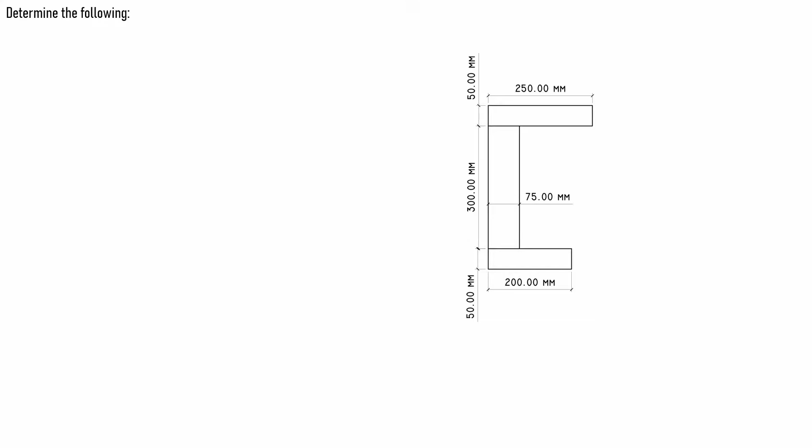Ito naman yung figure natin. Wala tayong symmetrical axis na parallel sa vertical at saka sa horizontal axis. Ang area natin composed ng tatlong parts. Hinati ko na lang ng 250 by 50, 75 by 300, tsaka 200 by 50. Ito yung mga kukunin ulit natin.

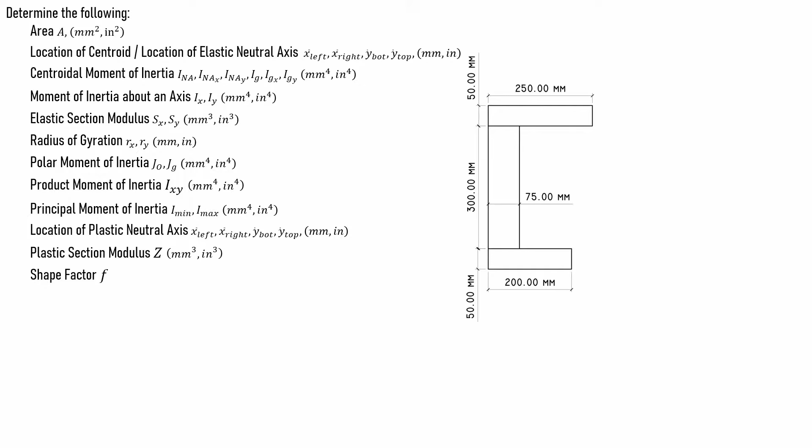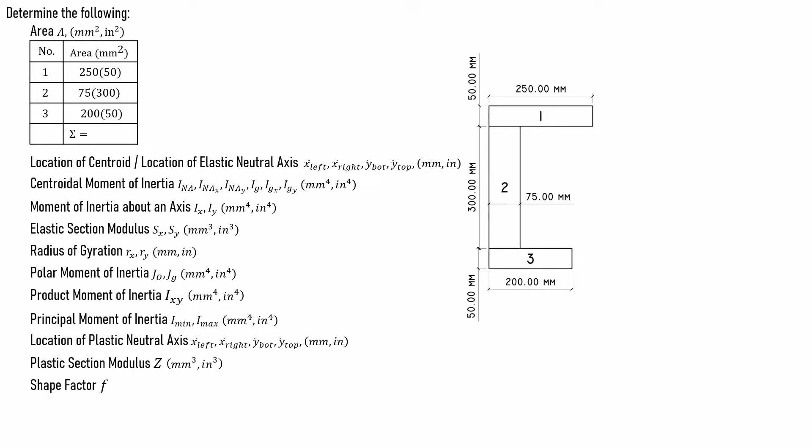Una natin kunin yung area. Lagyan ulit natin, divide natin to ng tatlong area. Tapos table ulit. Area number 1, 250 by 50. Area number 2, 75 by 300. Tapos yung area 3, 200 by 50. So sum ng area nila.

250 times 50 plus 75 times 300 plus 200 times 50. So 45,000.

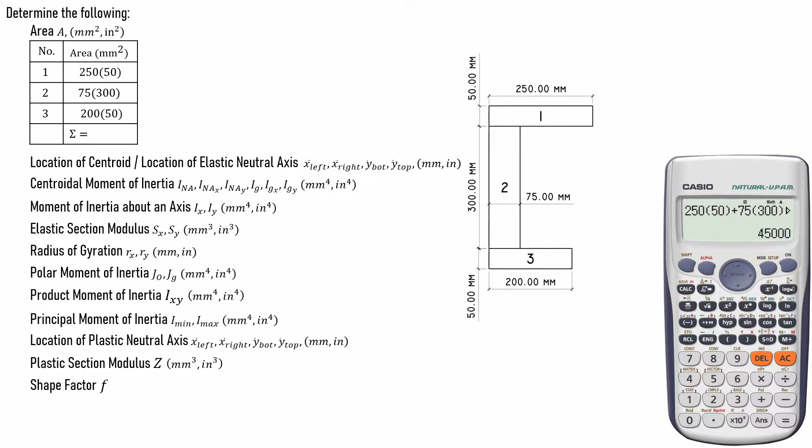Tapos naman yung location of centroid or location ng elastic neutral axis. Unahin natin dun sa x left at x right para makuha natin yung vertical na elastic neutral axis.

Yung distance ng local centroid ng area 1, 2, and 3 dun sa leftmost part ng section ay, una, area 1, so kalahati nun, so 250 over 2. Tapos yung area 2 dahil rectangle, so 75 over 2. Tapos yung area 3, so 200 over 2.

Tapos yung formula natin, equation para makuha yung x bar left. Yung total area multiplied dun sa x bar left equal sa summation ng ax left. Ito yung a times x left. So solve natin.

250 times 50 times yung x left niya na 250 over 2, plus 75 times 300 times 75 over 2, plus 200 times 50 times 200 over 2, over total area na 45,000.

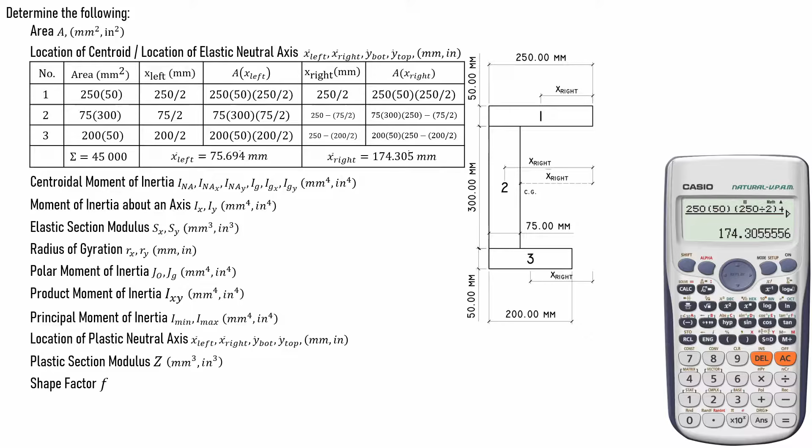Para naman dun sa location ng horizontal neutral axis, yung distance naman dun ay vertical. So y bot at y top. Una yung y bot. Table natin, distance ng individual centroid or local centroid papunta dun sa bottommost part ng section.

Sa pinakababa, yung una, area 1, so yung pinakamalayo, so 50. Yung vertical distance ng area 3 plus yung 300 nung sa area 2 plus yung kalahati ng 50, so 50 over 2. Tapos sa pangalawa, yung bottommost section plus yung kalahati niya, 300 over 2. Tapos sa pinakababa naman, so 50 over 2. Tapos multiply yung area times y bot.

Solve natin. 250 times 50 times 50 plus 300 plus 50 over 2, plus 75 times 300 times 50 plus 300 over 2, plus 200 times 50 yung area 3 times yung distance, so y bot, so 50 over 2, over total area na 45,000.

Yung y bar bot naman ay 209.722, so store natin to sa y. Para naman dun sa y bar top, kunin naman natin yung y top section.

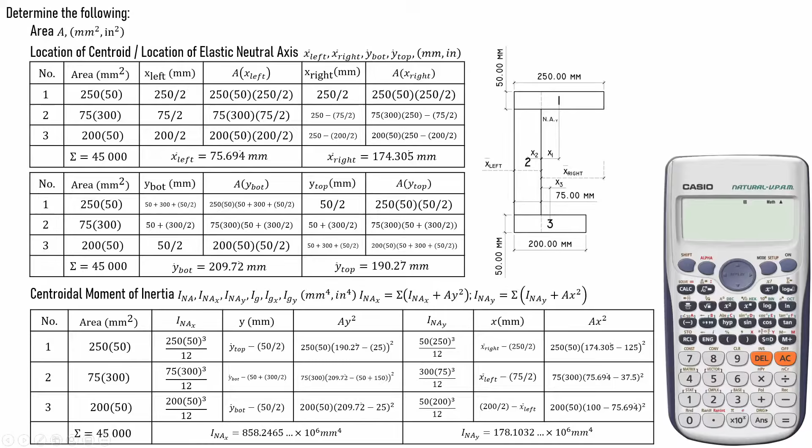So tanggalin natin yung mga hindi na gagamitin. Tapos lagyan na natin ng maayos. Next naman ay yung moment of inertia about an axis.

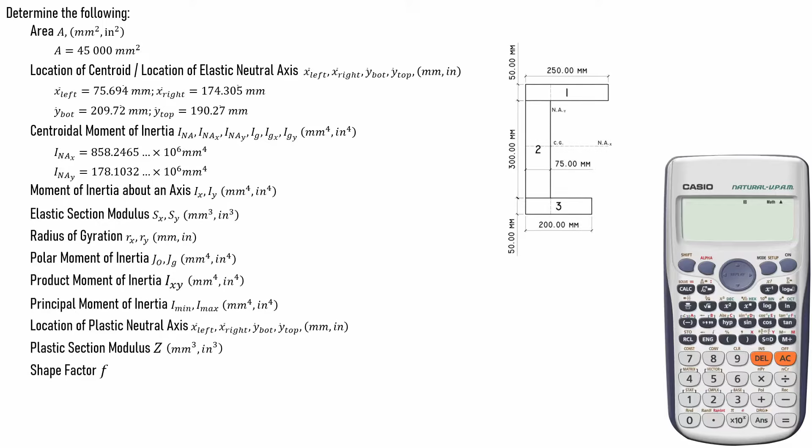So yung axis natin, nilagay ko na lang ulit doon sa leftmost, pati sa bottommost part. So summation ulit ng centroidal moment of inertia plus yung AY squared, transfer formula yung tawag. So yung una, buong figure na to, yung centroidal moment of inertia na-compute na natin, nakastore sa D at E. Tapos yung area, so total area, and then yung Y, vertical distance. So yung vertical distance natin mula dun sa centroid, papunta dun sa yung axis natin sa X. So Y bot, tapos yung sa vertical naman, so X left naman dahil nasa leftmost part.

So solve natin itong dalawa. So yung una, nakastore sa D, plus yung area na nakastore sa A, times yung Y bot na nakastore sa Y, squared. Tapos yung pangalawa, yung vertical na nakastore sa E, plus yung area na nakastore sa A, and then X squared. So yung unang sagot natin, so 28375. Tapos yung pangalawa, so 4359375. So lagay natin, 2.8375, tapos times 10 raised to 9.

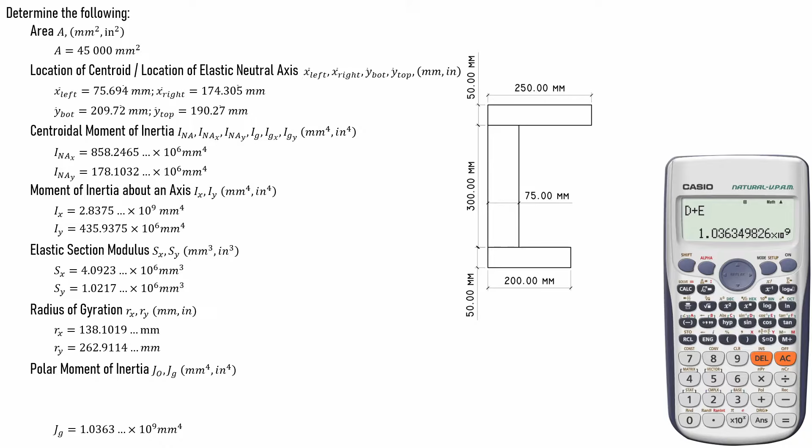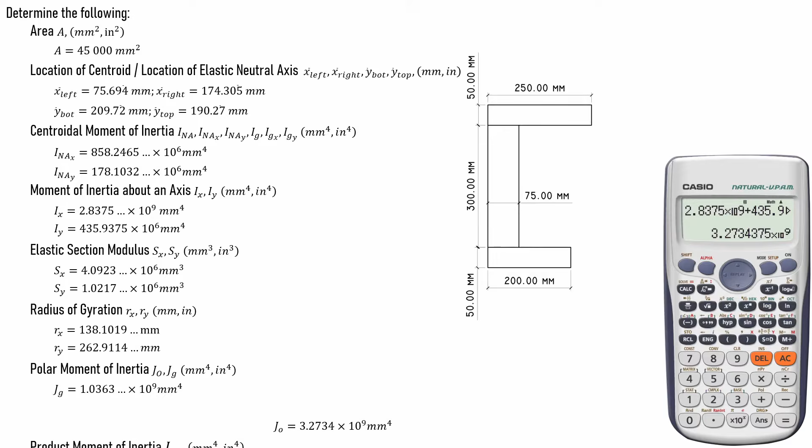Para naman dun sa J sub O, yung IX tsaka IY, so try natin: 2.8375 times 10 raised to 9, plus 435.9375 times 10 raised to 6, so 3.2734 times 10 raised to 9. So okay pa rin, millimeters raised to 4 naman yung units para dun sa polar moment of inertia.

Next ay yung product moment of inertia. Dahil hindi tayo symmetrical dun sa vertical pati dun sa horizontal na axis, magko-compute tayo. Product moment of inertia, summation ng individual product moment of inertia plus yung AXY. Yung product moment of inertia natin ng individual section or figures dahil rectangle, meron silang symmetrical axis, so our axis of symmetry, 0 doon. Tapos doon naman sa AXY, area, area 1.

Tapos yung X, X1, positive yung nakalagay dito. Yun yung horizontal distance mula doon sa center or sa centroid papunta doon sa centroid niya. Kung naaalala pa doon sa introduction, nasabi doon na makakabuo tayo ng parang Cartesian coordinates tapos meron tayong mga quadrants. Doon sa first quadrant, dalawang positive, so positive yung sa X, tsaka positive yung sa Y. Dahil yung X natin dito nasa first quadrant or nasa right siya nung centroid, therefore positive dito. So ang distance naman nun yung X1, x bar right, so makikita sa figure, x bar right minus yung kalahati ng 250.